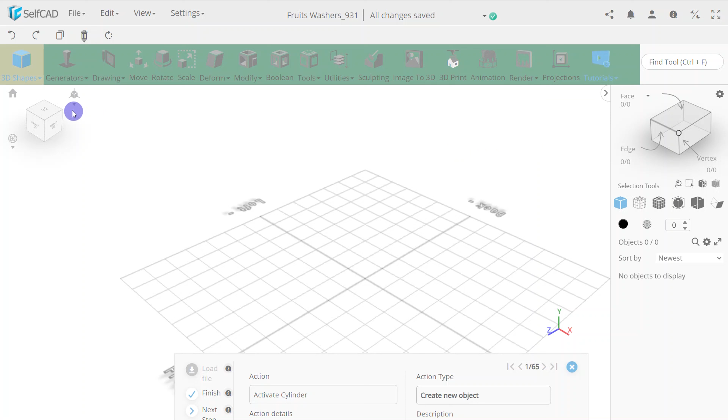To begin, we'll create the base cylinder, which will serve as the starting form for the washer. Activate Cylinder from the 3D Shapes category on the toolbar. For this example, set the height to 50 and the horizontal segments to 128 to give us a smooth circular form. Once that is done, click the check mark in the upper left corner to finalize the cylinder.

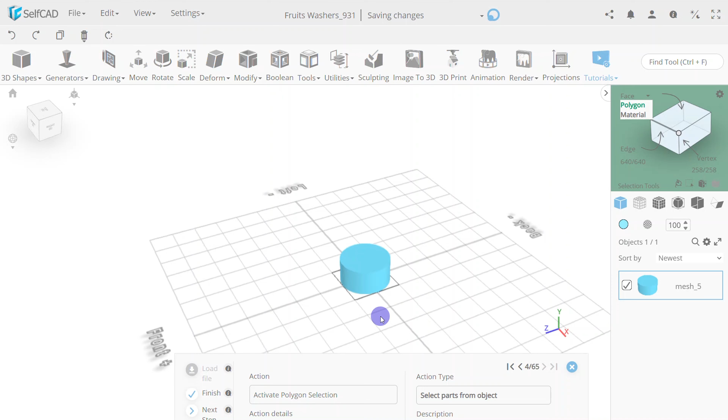Now that we have the basic form, the next step is to open it up so it can actually function as a container. Activate Polygon Selection, then click the top face of the cylinder to select it. After selecting it, click Delete to remove that face. This gives us an open cylindrical shape, which is much closer to the structure we need.

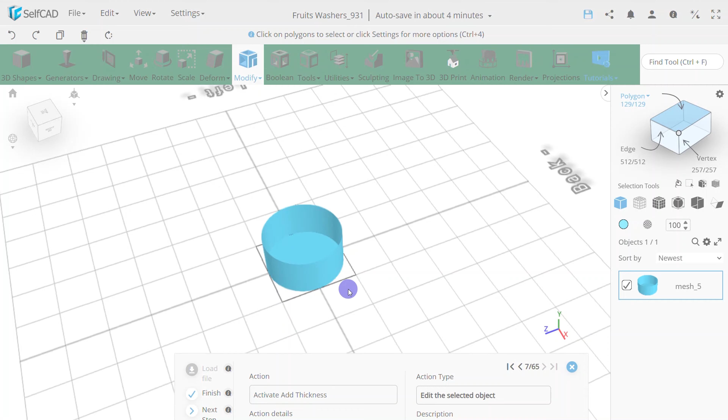At this stage, the form is open, but the walls are still too thin and would not be ideal for practical use or 3D printing. So now we improve the design by making it stronger. Activate Add Thickness from the Modify category on the toolbar. Set the thickness to 5, then click the check mark to finalize. You'll notice that the sides are now much thicker, which makes the washer sturdier and more suitable for printing and everyday handling. Next, we need to think about usability.

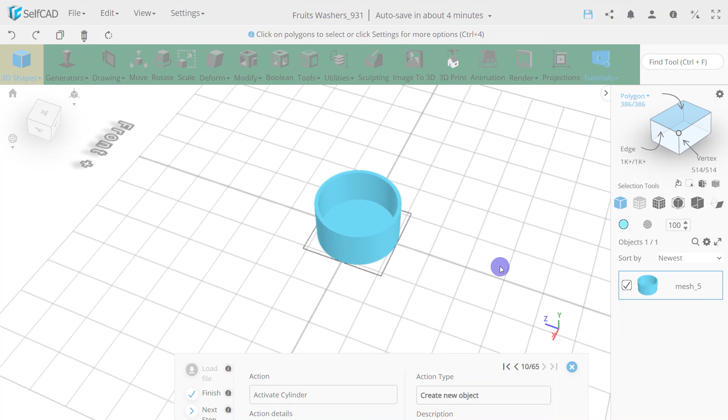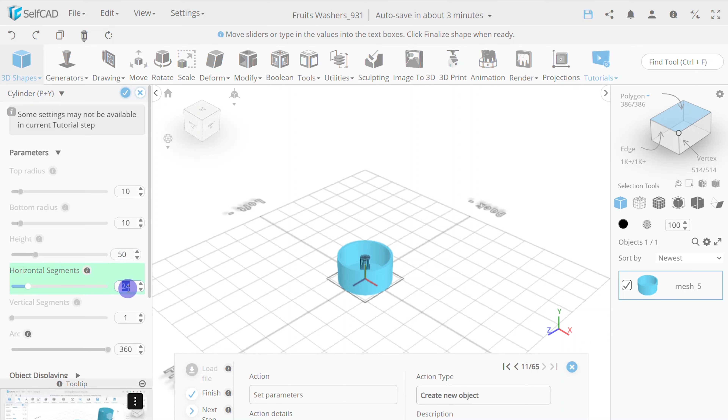A fruit washer should be easy to hold, so we'll add a handle-like side feature. Activate Cylinder again from the 3D Shapes category. This cylinder will act as a cutter to shape the handle area. For this example, set the top radius to 10, bottom radius to 10, height to 50, and horizontal segments to 24. Then position and rotate it so it intersects the side of the main body where you want the handle opening to be. Once it is properly placed, click the check mark to finalize.

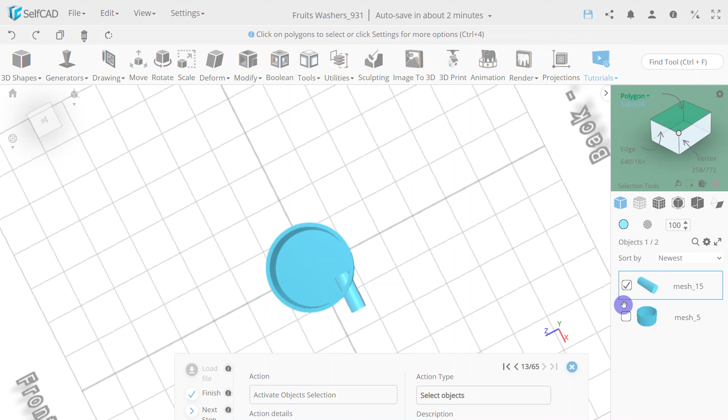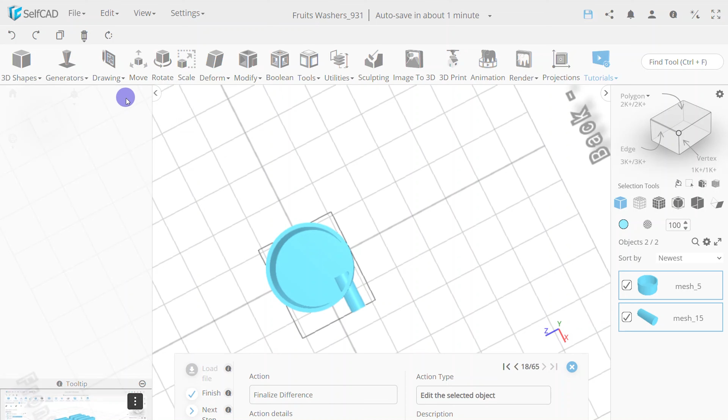Now we'll use this cutter cylinder to create the handle opening. Select both the main body and the cutter cylinder, then activate Boolean from the Boolean category. In the Tool panel, choose Difference. Select the cylinder as the object to subtract and make sure to enable Keep Subtracted Object because we'll still need that cylinder for the next step. Then click the check mark to apply the difference. This creates the handle cutout while preserving the cutter object for reuse.

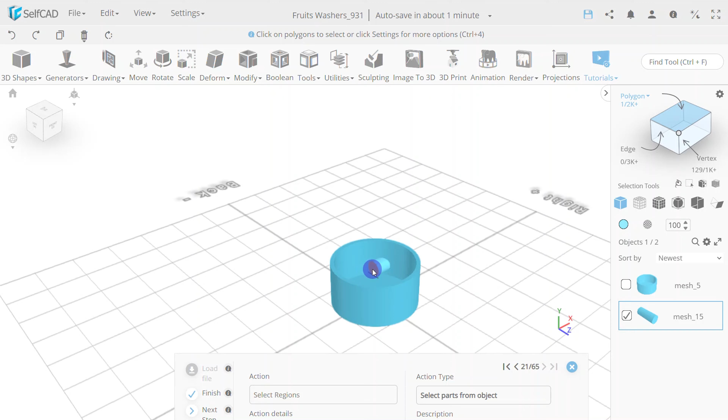Since we want the washer to remain lightweight and material efficient, especially for 3D printing, the handle itself should also be hollow. Select the saved cylinder, then activate Polygon Selection. Select the two end faces of the cylinder and delete them. This opens both ends of the cylinder. To give it proper wall thickness, activate Add Thickness again from the Modify category, adjust the thickness as needed, and finalize by clicking the check mark. Now the handle is hollow, stronger, and uses less printing material.

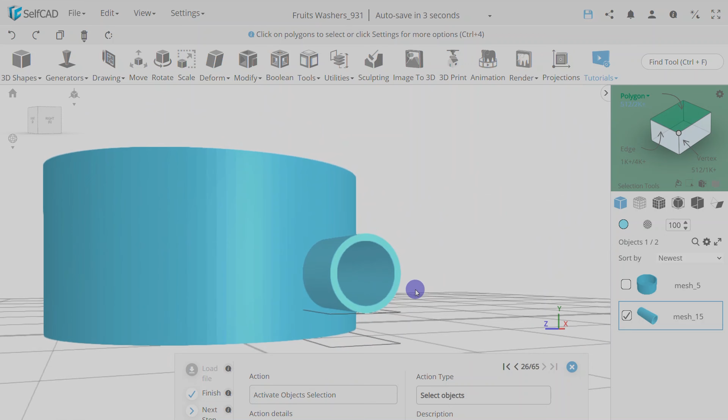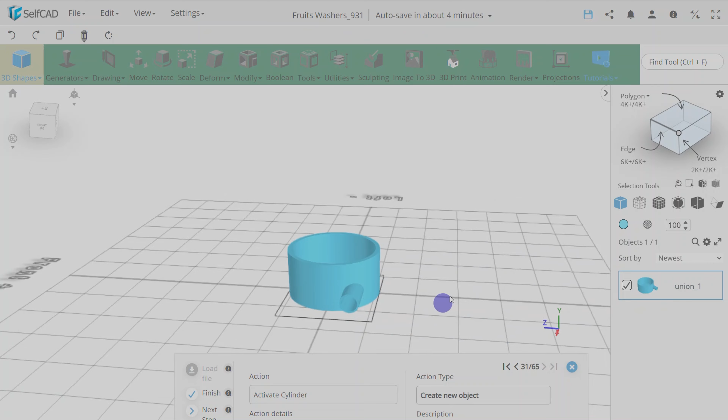With that done, we can now combine the handle with the main body. Turn off Region Selection and return to Object Selection. Select the hollowed handle and the main body, then activate Boolean again. This time, choose Union and click the check mark to merge the two shapes into a single object. At this point, the design is starting to look more functional because we now have a body and a grip integrated together.

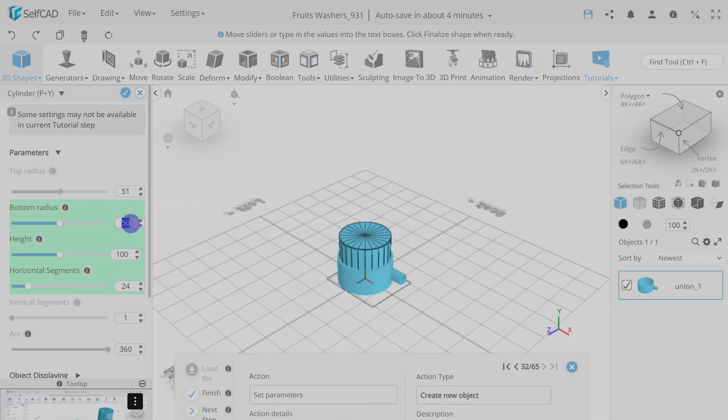The next design step is to create the fruit holding section. We want a rounded inner form that can comfortably hold fruit while still leaving enough space for washing and drainage. Activate Cylinder from the 3D Shapes category. Set the top radius to 51, bottom radius to 51, height to 55, and horizontal segments to 128.

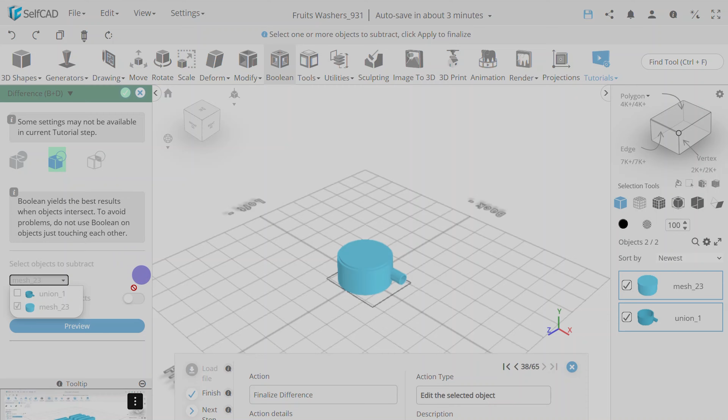Set the Y position to 4, then click the check mark to finalize. Once that new cylinder is created, select both the new cylinder and the merged body with handle. Activate Boolean, choose Difference, and select the new cylinder as the object to subtract. Finalize by clicking the check mark.

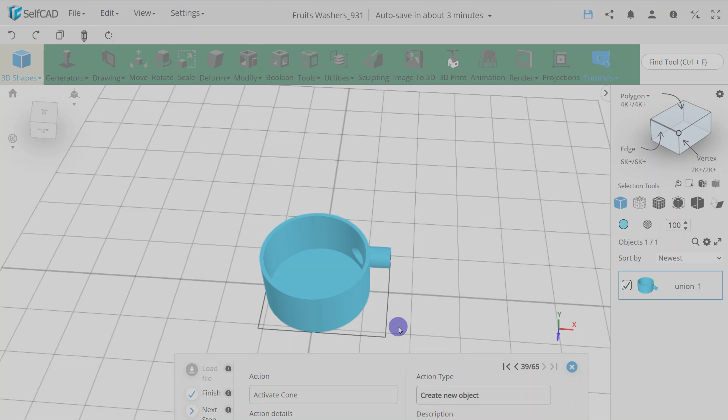This hollows out the larger cylinder while preserving the handle space, ensuring the handle does not protrude into the fruit holding area. This is an important design decision because it keeps the inside smooth and usable. Now we'll refine the shape so it looks more like a fruit washer and less like a plain container. To do that, we'll create a tapered top section.

Activate Cone from the 3D Shapes category. For this example, set the radius to 35, height to 45, horizontal segments to 50, and Y position to 4. Click the checkmark to finalize. Select both the cone and the fruit body, then activate Boolean and choose Union. Click the checkmark to merge them.

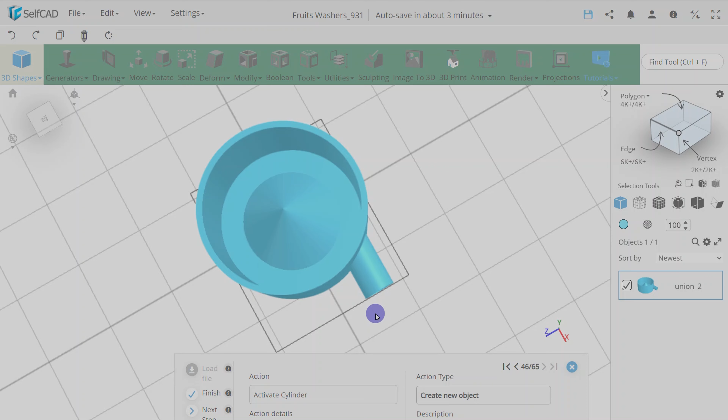You'll now see that the top section has a more organic, fruit-like form, which improves both the appearance and the functionality by helping guide fruit into the washer more naturally. Now that the main body is complete, we need to focus on drainage, which is one of the most important functional features of this design. Without holes, water would collect inside, and the washer would not serve its purpose effectively.

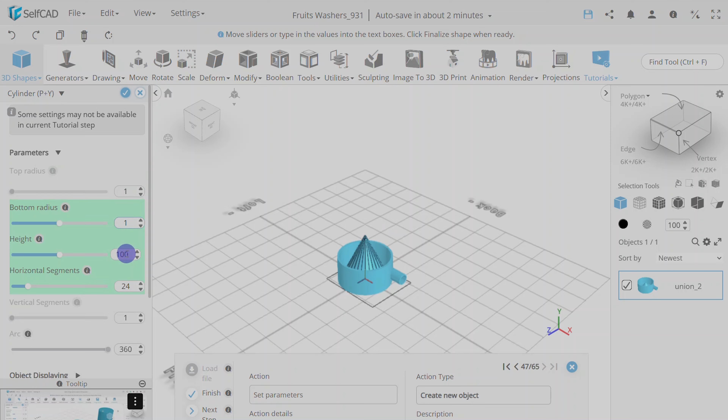To create the drainage holes, activate Cylinder from the 3D Shapes category again. Set the top radius to 1, bottom radius to 1, height to 10, and horizontal segments to 24. Then set the Z position to -49 and click the checkmark to finalize. This small cylinder will act as our first drainage hole. Instead of creating each hole manually, we'll use duplication tools to build a clean and consistent pattern.

From the Tools category, choose Copy Offsets. Set the Z offset to 4 and the amount of copies to 3. Then click Copy. This creates a vertical row of small cylinders. Select those cylinders. Then from the Edit menu on the top toolbar, choose Group. Grouping them keeps the design organized and makes the next duplication step much easier.

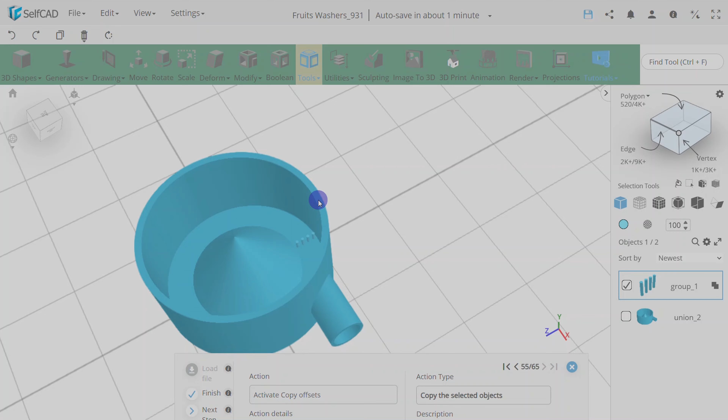Now we'll distribute these holes in a circular pattern, so the washer drains evenly across the body. With the grouped holes selected, go back to Copy Offsets in the Tools category. This time, set the operation to Pivot and set the amount of copies to 20. Click Copy, then close the panel. You'll now see a circular arrangement of small cylinders around the body, which will become the drainage holes.

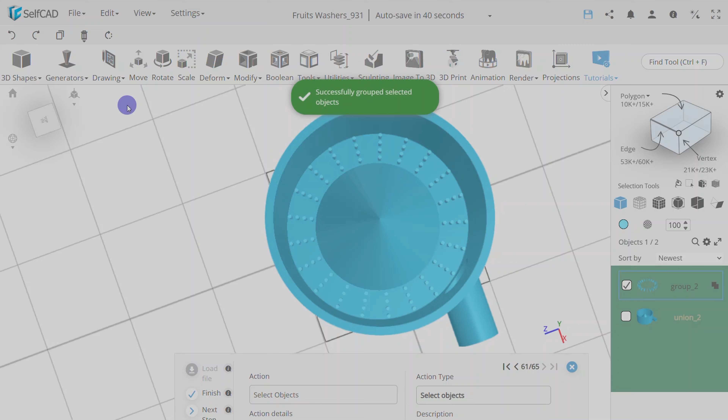To prepare for subtraction, group the hole pattern again by going to Edit and selecting Group. Then select both the fruit washer body and the grouped seed holes. Activate Boolean, choose Difference, and select the grouped cylinders as the object to subtract. Finalize the operation by clicking the check mark. And just like that, the fruit washer design is complete.

At this point, you have created a model that balances shape, strength, comfort, printability, and function. The body holds the fruit, the handle improves grip, the hollow structure saves material, and the patterned holes allow water to drain efficiently. The next step is to slice the model and prepare it for 3D printing. Once printed, remove supports, clean the model, and your fruit washer will be ready for use.